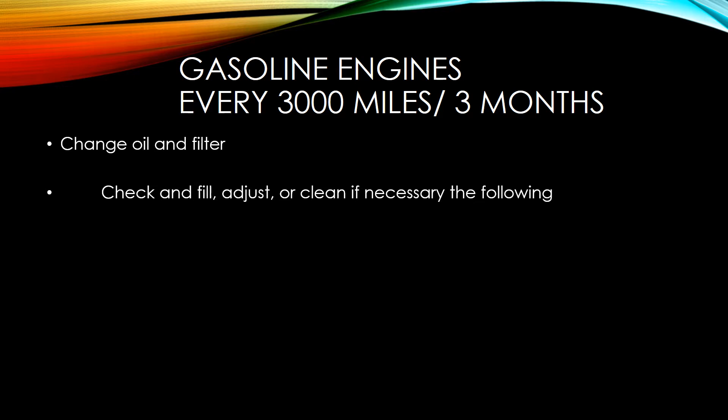But what we want to do every 3,000 miles is we want to change the oil and filter. Even though some oils boast of longer in between mileage, like 5,000 miles, we just really ought to stick to 3. That's what all ASE master technicians say to do. So when we're doing that, we want to check and fill or adjust or potentially clean the following items.

Check our antifreeze. We want to make sure that we got enough of it in there. We want to make sure, especially in the winter, that it's adequate to freezing temperatures. We'd like to check our power steering fluid. Now, I will tell you, like on my vehicle, it doesn't have power steering fluid because my vehicle has electronic steering. So you'll want to look in your owner's manual for that.

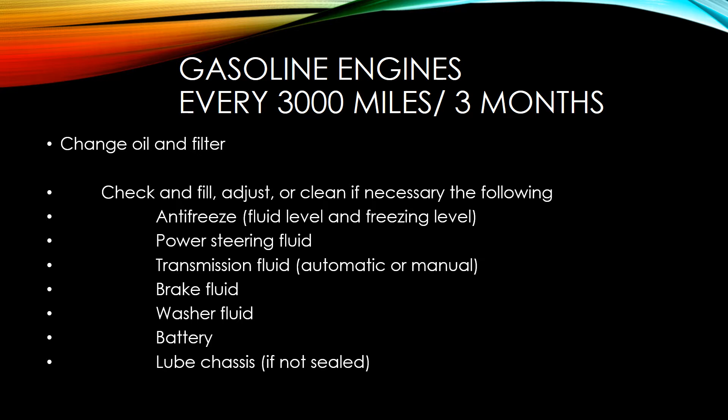Also check your transmission fluid, automatic or manual transmission. Check our brake fluid, our washer fluid. Check and clean your battery terminals, and you may even need to replace a terminal end if it's not staying tight there on the battery. So we also want to lube the chassis. In the next slide, we'll talk about what is a serviceable chassis part versus what is not.

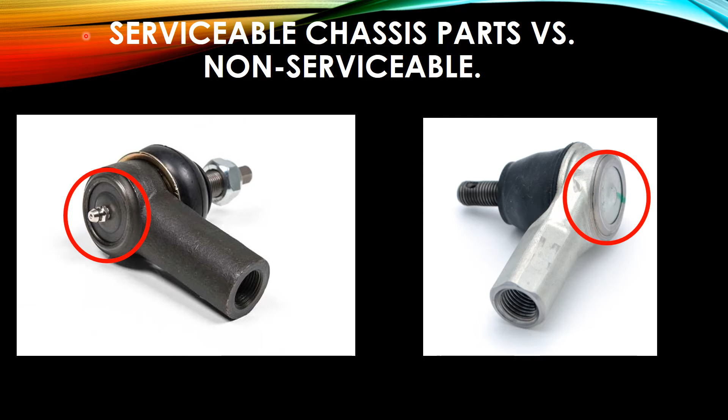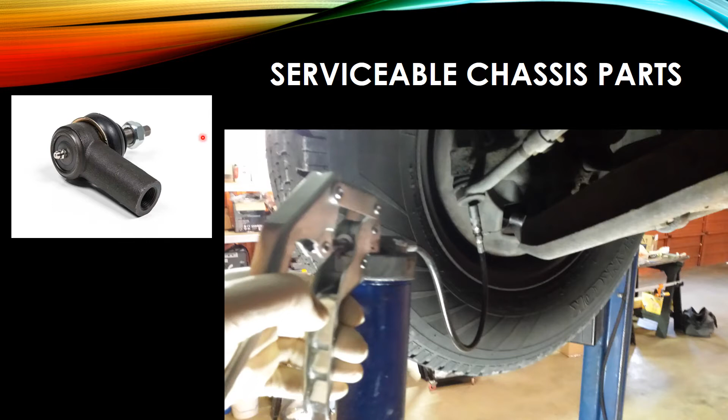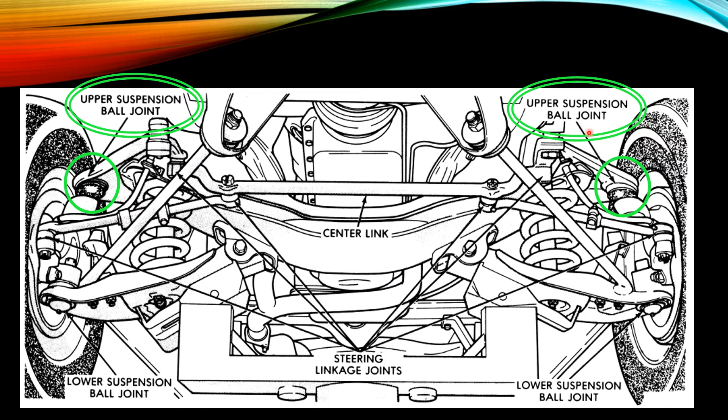Okay, so in this drawing, we'll be able to point out, this is just basically common places that I'd have you look after you've raised your vehicle up and you're going to change the oil. This is just good places to look. Here on the top, you've got your upper ball joints, one over here, and down at the bottom. These are the easiest to usually see.

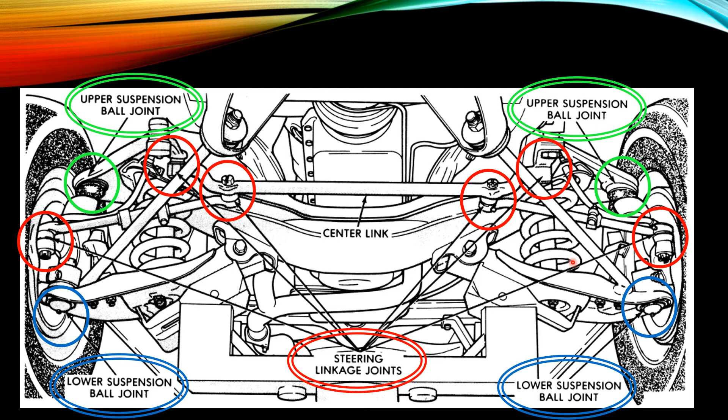Lower ball joint, lower ball joint, and then all of these, these are all the steering linkage. You got an outer tie rod, inner tie rod. Here's your center link, inner tie rod, outer tie rod, and then you've got that connection up here and here. There could be some others, but mostly this is what we'd be looking at.

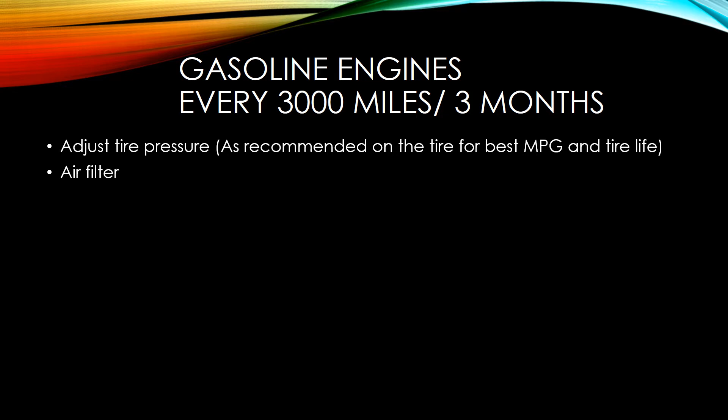Want to check our air filter. Now, I'll just tell you, I don't change my air filter every oil change. I look at it every oil change, but typically every other. If you drive in the country, this could be sooner because you get more dust and whatnot up in the engine compartment. But if you drive in town mainly, you shouldn't need to change it every single oil change.

If you have a manual transmission, you'll want to check your clutch fluid. If you have a four-wheel drive, you'd have a transfer case. A rear-wheel drive vehicle would have a rear differential. You want to check that. If you have a four-wheel drive, you'd have a rear differential and a front differential. And then you'd also want to check to make sure that all of your lights work. Make sure your high and low beams aren't burned out, turn signals work, and just check them all.

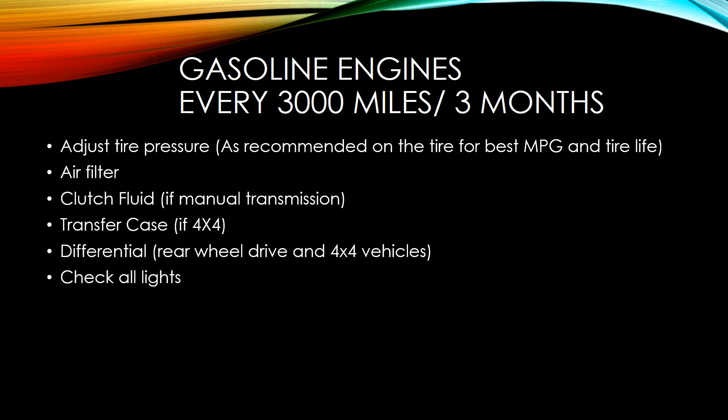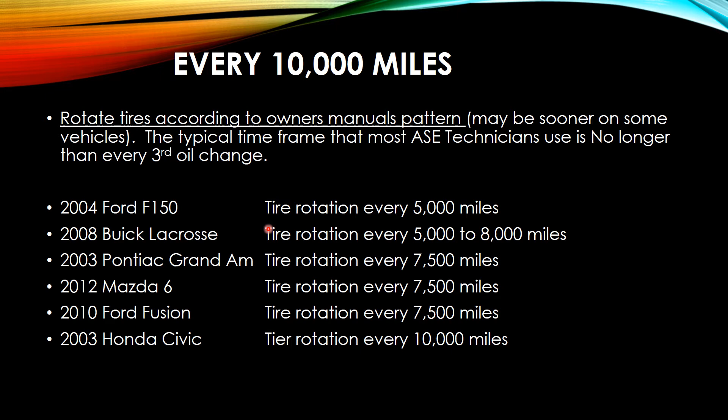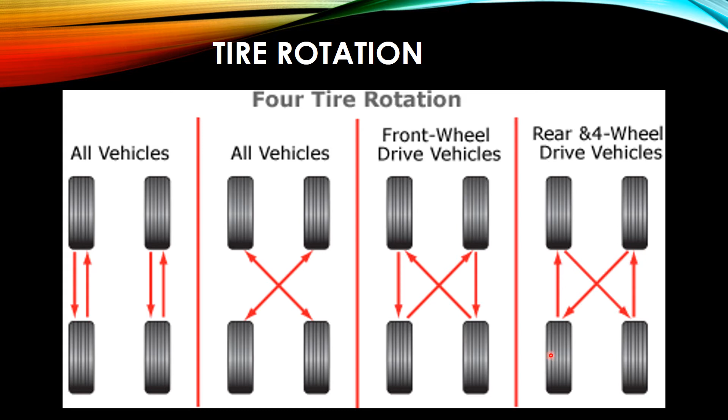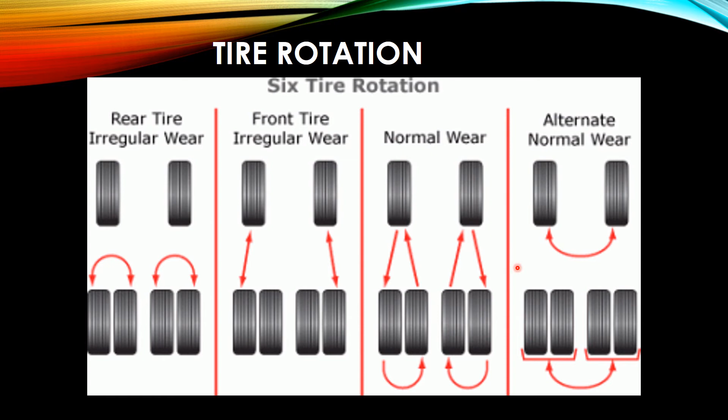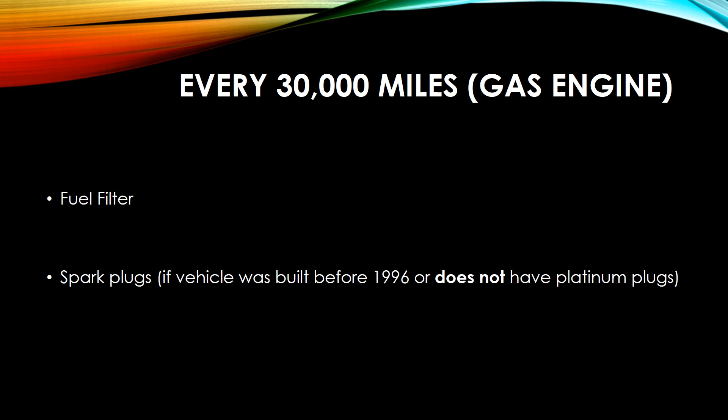Okay, so moving on, we're almost done with the gas engine, but approximately at 30,000 miles, you'd want to check your fuel filter. I would say that a lot of vehicles today don't have a serviceable fuel filter, so check your owner's manual on that. If you have an older vehicle, built before 96, or it doesn't have platinum plugs, you would want to change your spark plugs every 30,000 miles.

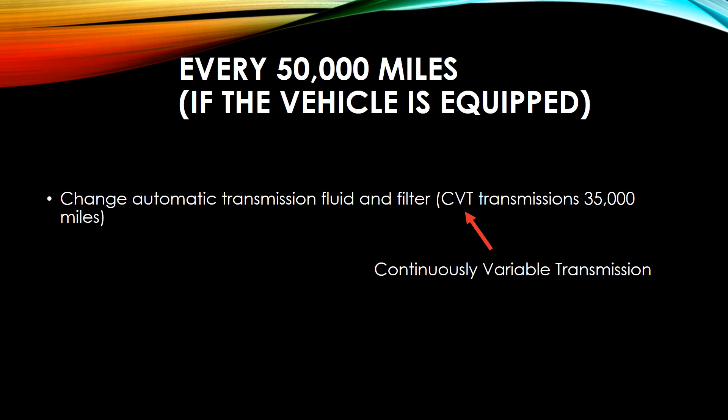At 50,000, this is where we'd be looking at changing our automatic transmission fluid and filter if the vehicle has a serviceable filter. If not, you're not going to touch it. CVT transmissions, you'd be looking at every 35,000 miles. Again, the owner's manual is going to tell you whether or not that vehicle has an option.

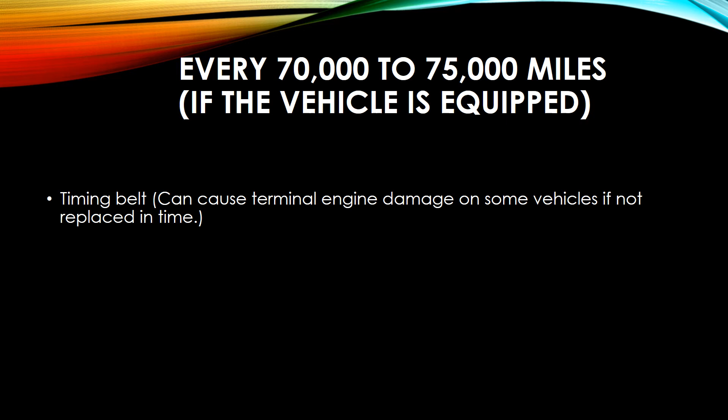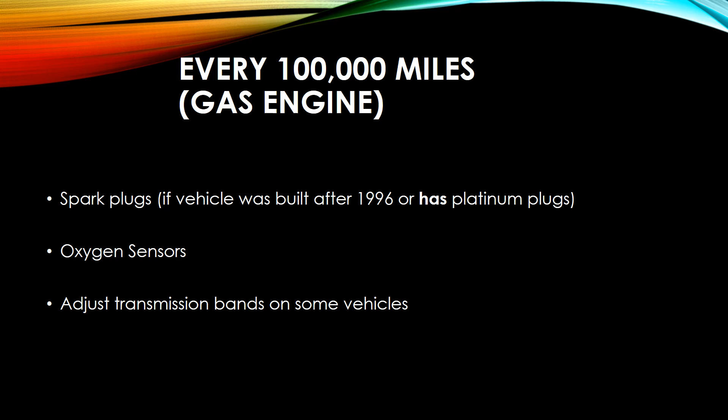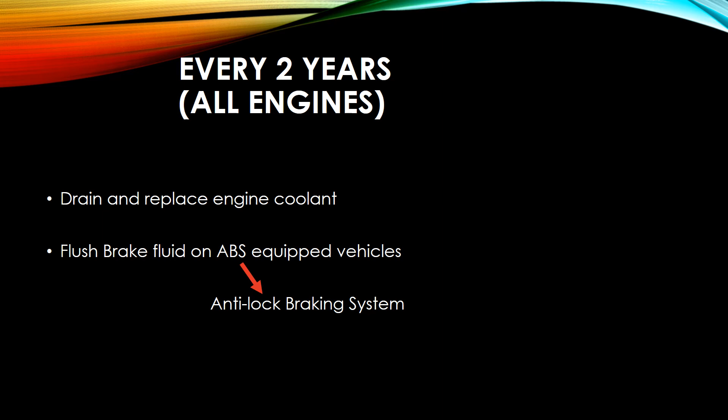Yeah, there we are. All right, so this will be the last slide on gas engines, but this is actually for all engines. Every couple years, you'd want to look at draining and replacing the coolant. Also, if it is equipped with ABS, anti-lock braking system, you'd like to flush that brake fluid and get new brake fluid in there. So that'd be basically every couple years or so. All right, so now we're going to move on to a diesel engine.

With a diesel engine, we go a little bit longer. They're all synthetic oil, and they go 5,000 miles on the oil and filter. Now, here's where a diesel engine is a little bit different than a gas engine. We'll use a 1999 Ford F-250 with a Power Stroke diesel engine as our example. I believe that's 7.3 liters. So this engine takes 3.75 gallons of 15W-40 oil.

Now, 3.75 gallons. That sounds like a lot. How many quarts do you think that is? Well, we can do the math. 4 quarts to a gallon. We just multiply that 3.75 times 4. That gives us 15 quarts. Now, you take the same vehicle, but with the largest gasoline engine, which would be a V10, 10-cylinder engine, and it only takes 6 quarts. That's less than half. So a diesel engine is going to use a whole lot more oil, but you can use it for a little bit longer.

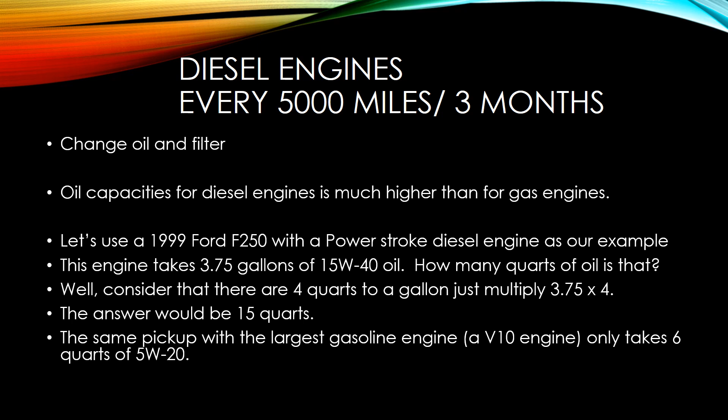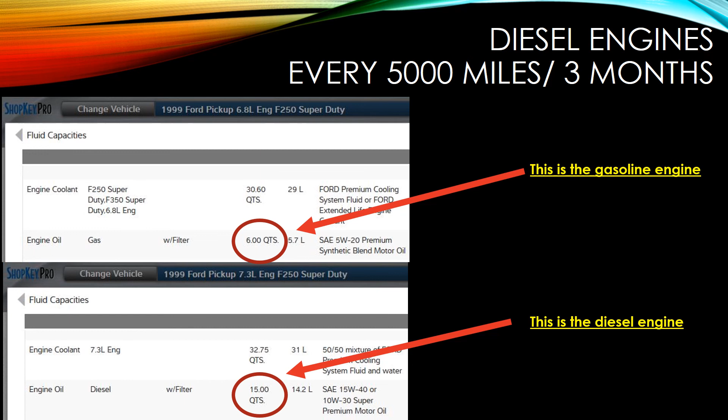All right, I took this one right off of here. This is using that 99 Ford F-250. You'll see up here on the top, that is the 6.8 liter gas engine, 6 quarts. And then the bottom example, that is the 7.3 liter diesel engine, and there you've got 15 quarts. So just so you know the difference there.

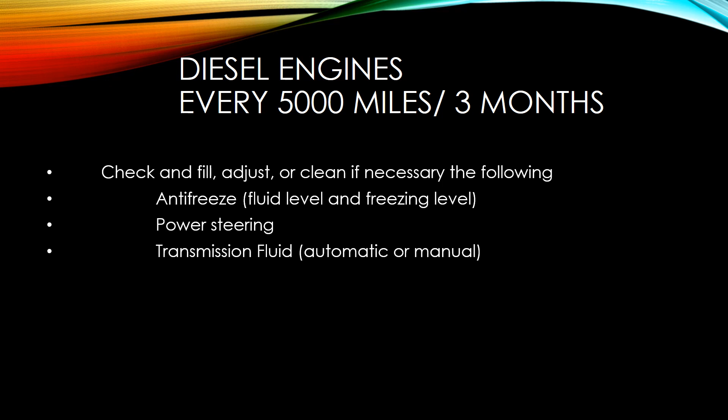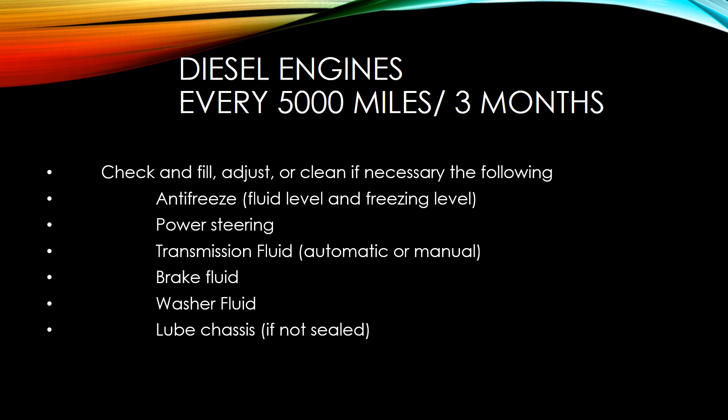Other things are very similar. You would still want to check, fill, adjust, clean if necessary, your coolant, your antifreeze, power steering fluid, transmission fluid, whether it's automatic or manual, brake fluid, washer fluid, lube the chassis, the same thing. You're more likely to find serviceable chassis parts on a pickup than you would on, say, an Explorer like my vehicle. And then obviously the battery. One of the different things on this, we'll just run through this one real quick.

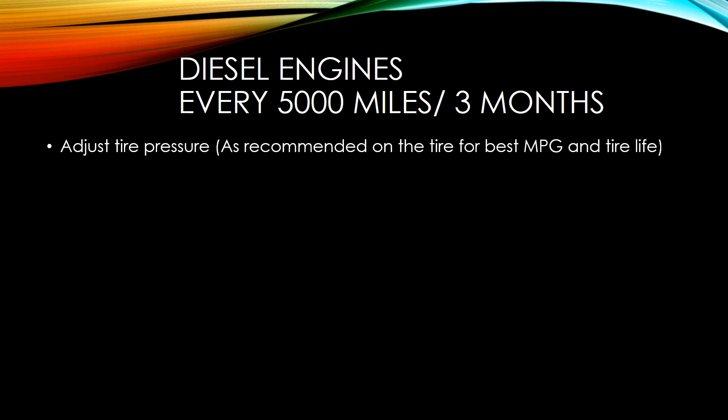Tire pressure, air filter, clutch, transfer case, and differential, just like before, but here's where it gets a little bit different, because if you remember back to the gas engine, it said to check that fuel filter every 30,000 miles. With a diesel engine, you need to change the fuel filter every 10,000, or every other oil change. It gets a little expensive to change the oil on a diesel engine all the time.

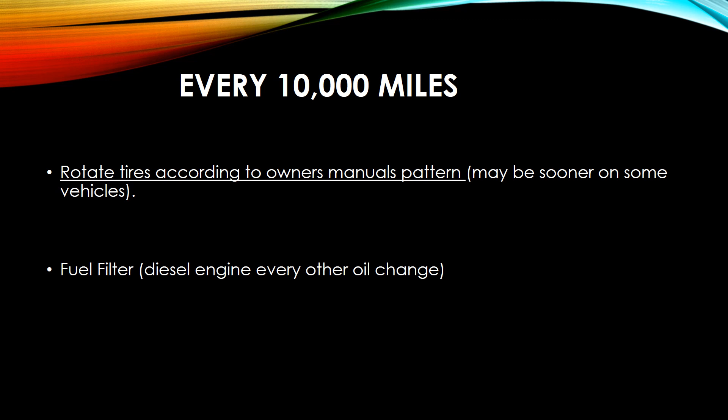And then you're rotating the tires. A lot of diesel owners will rotate every oil change. So it really just kind of depends on the person and the amount of wear that you put on a vehicle.